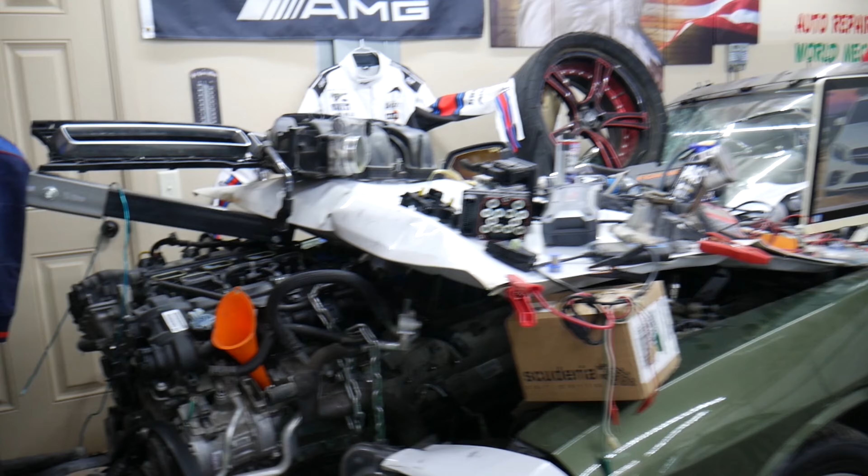So let's go ahead and start on it now. The hybrid fuses and relays—come guys, we'll show you where you can find them. Okay, mentally be prepared, we'll be working in many fuse boxes.

Quick guys, advice from us. 9 out of 10 owners of that Mercedes C-Class do not know about all the different fuse boxes in that Mercedes. You have many hidden ones. Some fuse boxes do not even look like fuse boxes. That's why we made one special video on our YouTube channel called 'Mercedes W205 Fuse Box Location and Diagram.'

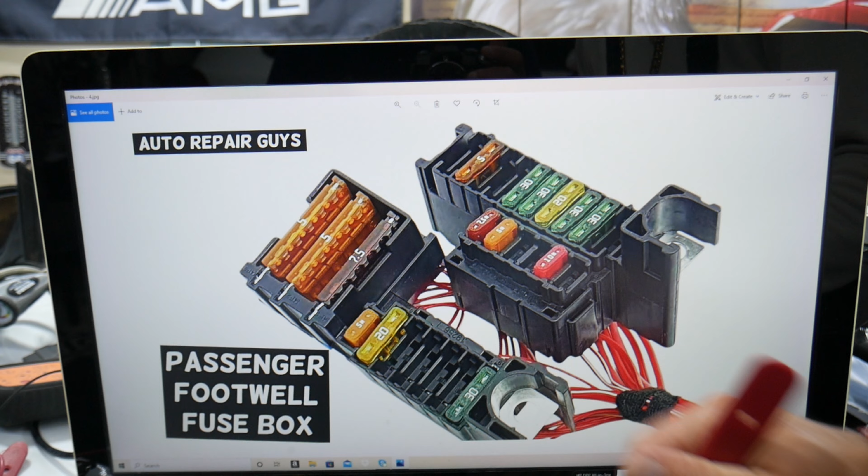And what do we guys need to do first? We need to come and open the passenger door. Here on the passenger side in the footwell compartment, on the A pillar, on that plastic trim, you have a cover. Open that cover. Behind it you have a fuse box with a layout like this one here.

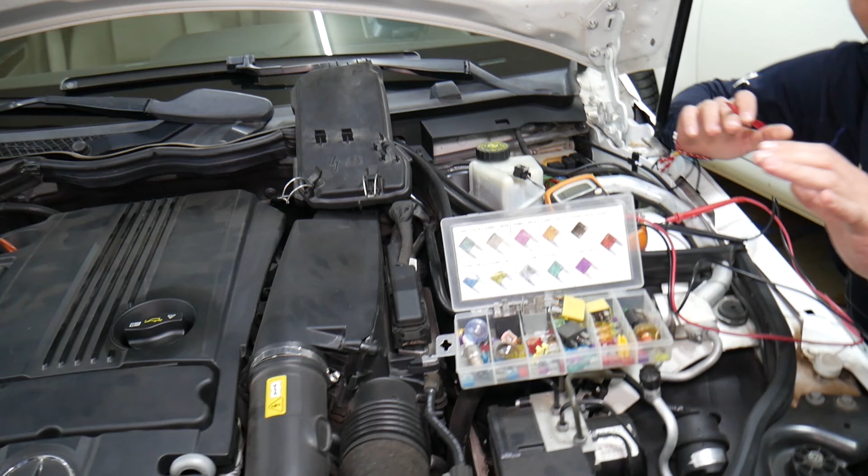Before we continue, let's explain quickly why it's always a good idea to test fuses and relays. People make one common mistake: they never test fuses or relays, they just look at them and assume they're good.

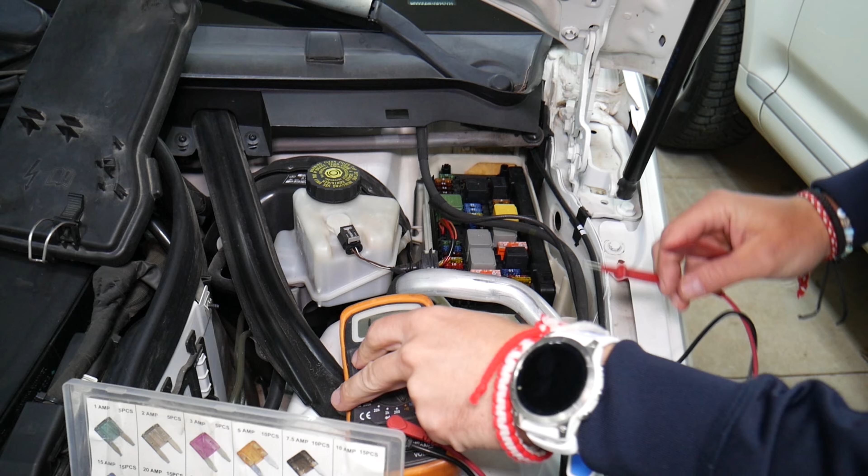At that point, they think they have a good fuse or relay and they start replacing modules, computers, and parts that can cost you thousands of dollars in repairs. Always test your fuses. You have no idea how many cars we've fixed for customers that said, 'Oh, I checked the fuse, everything's fine, but I still have a problem.'

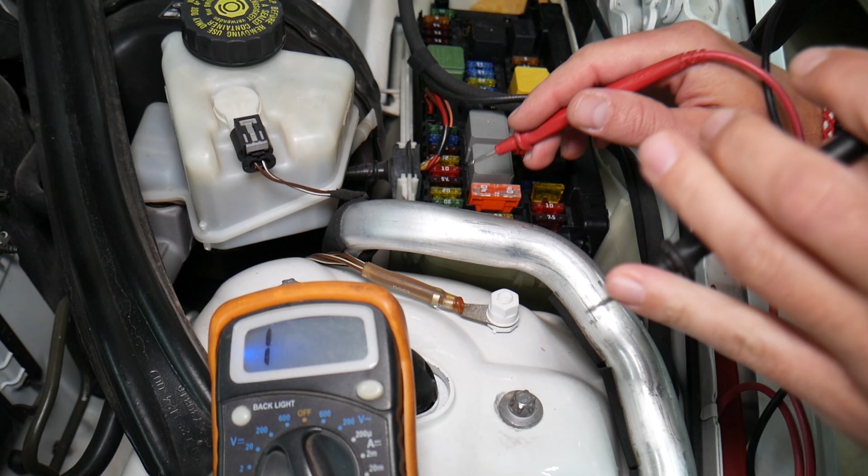Now, some fuses are super hard to see if they're burnt or not. Some of them will be really easily accessible—you can clearly see them—but there will be fuses that are not see-through, fuses that may look like they're not burned, but they're actually burned. And often, guys, you can actually test these fuses. Let me show you now without even removing them.

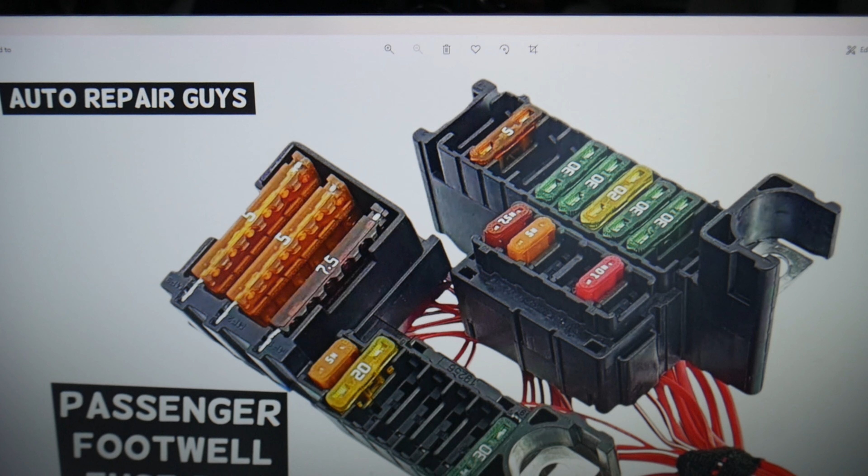Next guys, since we are already here in the interior, if you remove the glove box, behind it on the left side, behind the dash, you have a pre-fuse box. There will be many cables, of course, connected here. If you open it, you have that design here, guys.

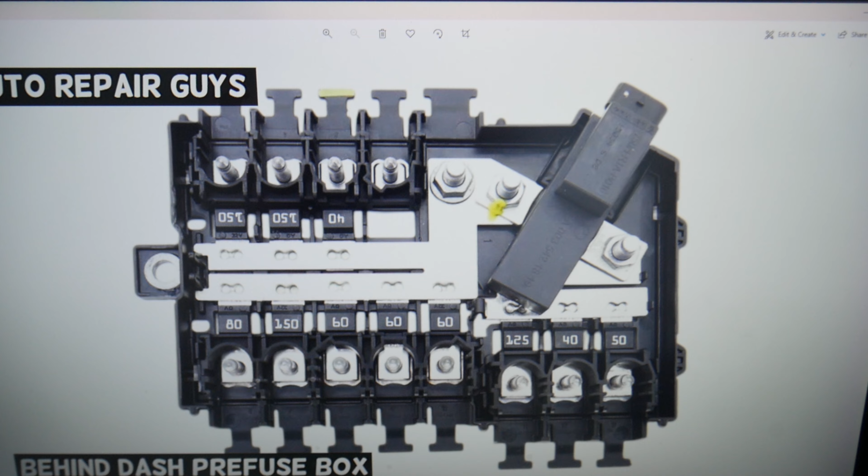Here we need to check two more fuses, okay, and you wonder which ones are those. Well, the first one is fuse number 2, okay.

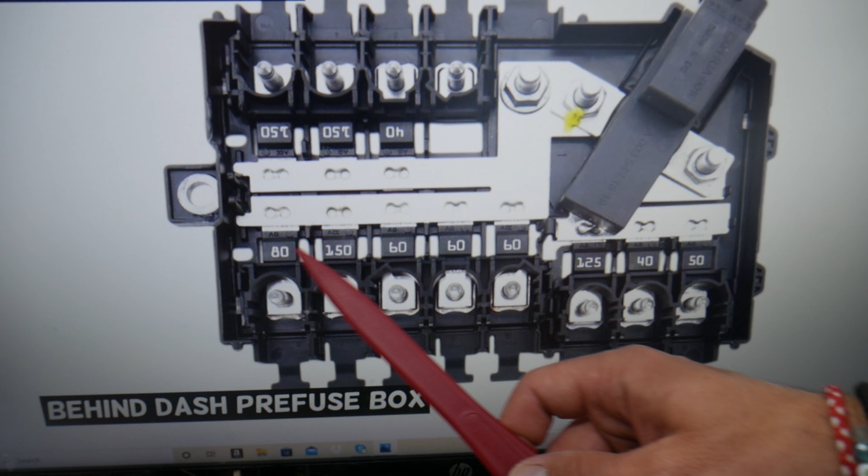Fuse number 2, guys, I want to show you that now, that's 5432. If you have it, it will be right here. That fuse box on ours was out of non-hybrid, so we don't have it, but that will be the fuse that you need to check. Then you need to check fuse number 10. It will be, because this one is 6, 7, 8, 9, 10. This fuse will need to be checked here.

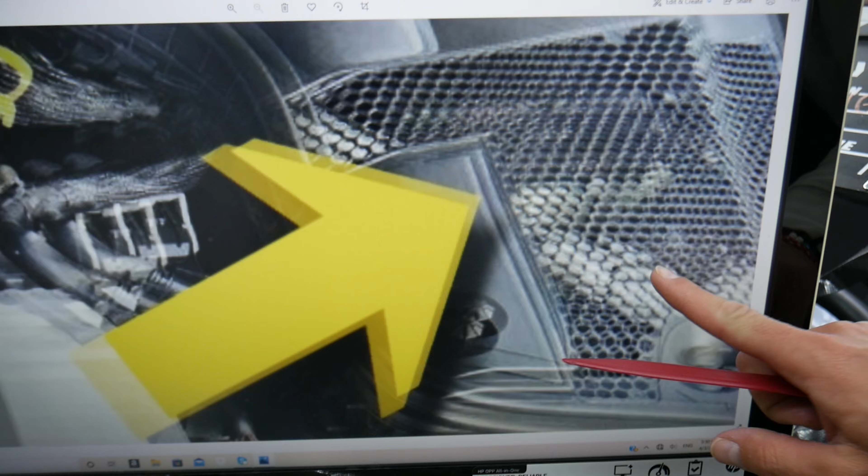Next, guys, we need to come and open the hood. Under the hood, facing the engine on the right side, on your driver's side, you see that knob? Turn it 90 degrees counterclockwise. You have one in the back, leave that cover, and right here you can kind of see the white and black. That's the engine fuse box with black lid. In order to remove the cover, unscrew the two bolts with Torx 22, open the cover, and that's the main engine fuse box.

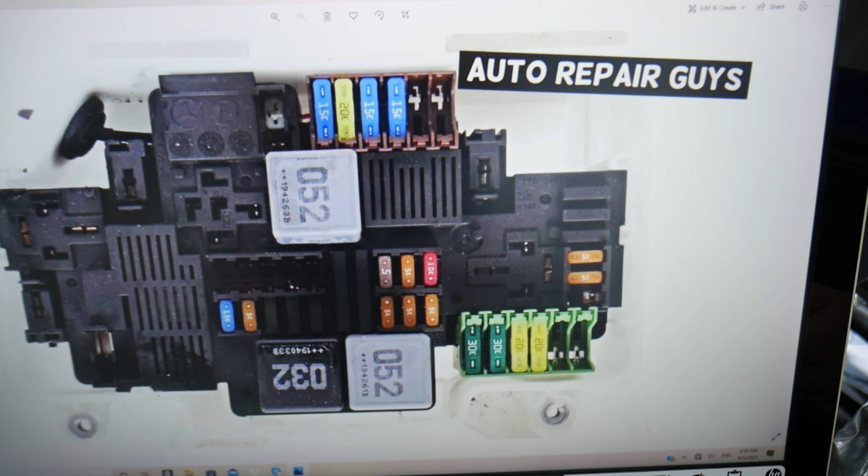Here specifically we will need to check a few more fuses, guys. Let me start now. Fuse number 100, where that one will be located, if you have it, it will be right here. It will be a humongous maxi fuse right here, fuse number 100. Then you will need to check fuse number 112. That one right here, this one will need to be checked.

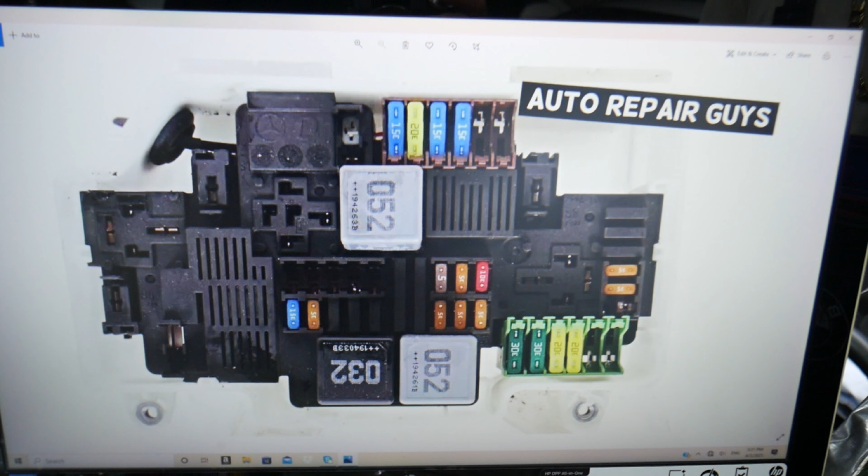Then you need to locate fuse number 118, guys. So that will be 15, 16, 17, 18. It will be that fuse right here. If you have that fuse, then you will need to locate fuse number 127. That one right there, 127. And you need to check fuse 129.

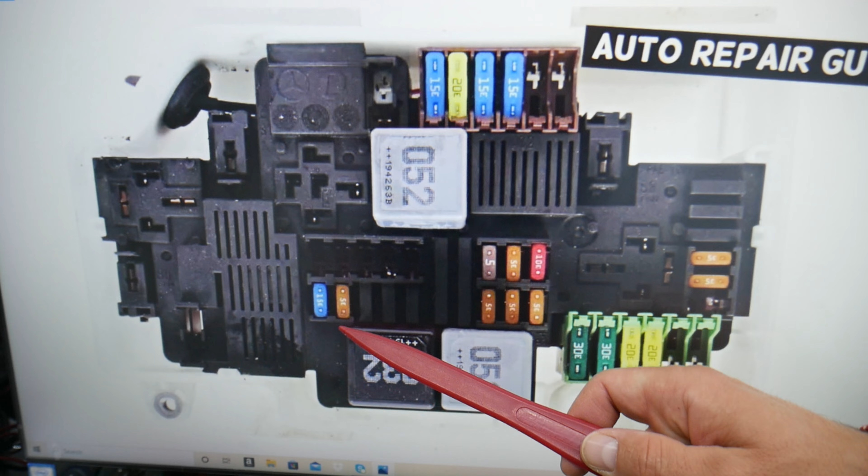Now 129, guys, you have integrated circuit fuses right here, which is 129 right here underneath, so that's a little bit hidden as well. You will have relay I right here that you will need to check. Let me show you what else you need to check. You may have a relay right here, Q, on the hybrids, that you will need to check as well. And here you have relay O. You see that relay? It's under the cover, integrated relay. That's O, J, and relay L. Relay O will need to be checked.

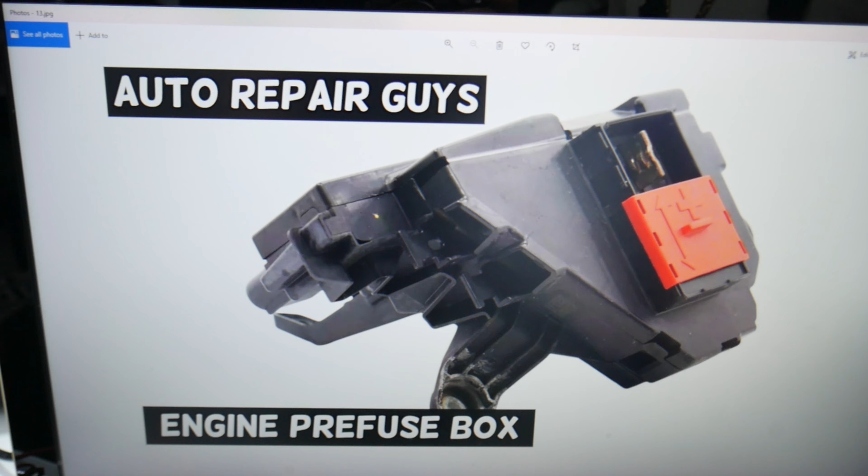Guys, we are not done. Why? Because here under the hood on the left side, facing the engine, on the passenger side, you see that cover where the battery sign is. If you open it, that's your positive, the jump starter terminal. That looks like this one, right? Now, guys, if you look at the back side, that's actually a pre-fuse box. And that pre-fuse box, on the inside, will have almost the same kind of fuses like the pre-fuse box behind the dash.

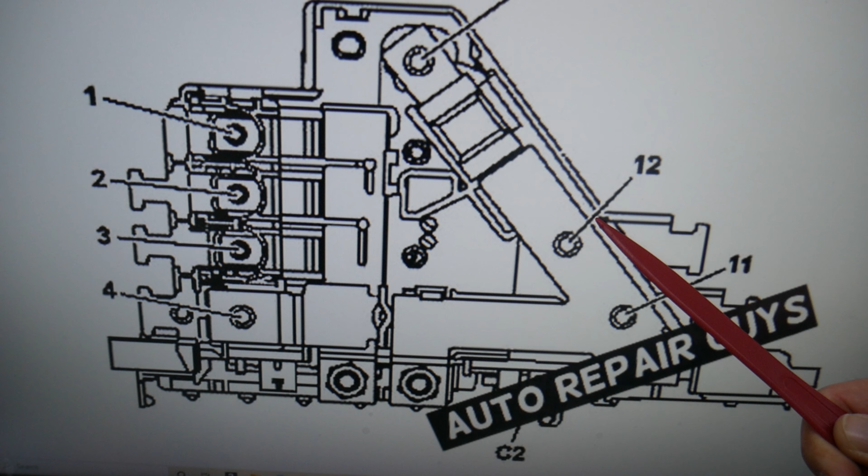Here specifically, guys, we will need to check a few different ones, and you have two different kinds. Now, if you have that pre-fuse box, depending on which year and model, you will have fuse number 12. If you have that kind of fuse box, it will be fuse number 12 that you will need to check. And also the other one, guys, will be fuse number C2 right here on the bottom.

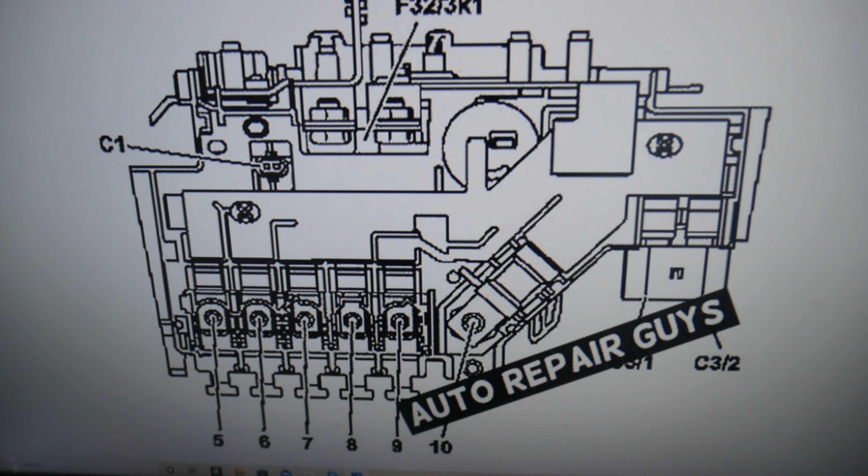Now, if you guys have the other kind of fuse box that looks like this one right here, you will need to check fuse number... okay, give me one second here, guys. We're talking about fuse C1 in that case, and C1 will be this fuse right here. It will need to be checked, guys. Okay, right there.

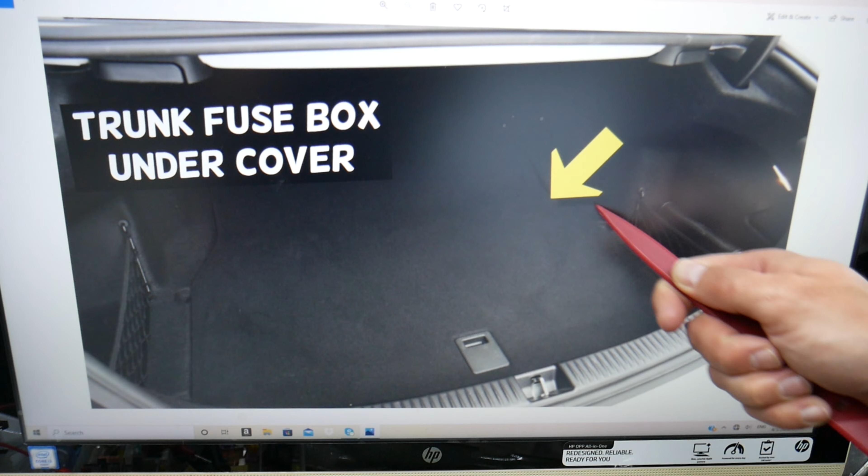Now we're not done. You think you're done, right? We're not. In the trunk, open the trunk, lift the carpet liner up. Right here in the corner on the right side, you have another carpet liner that's cut out, lifted up. Underneath is the main trunk fuse box.

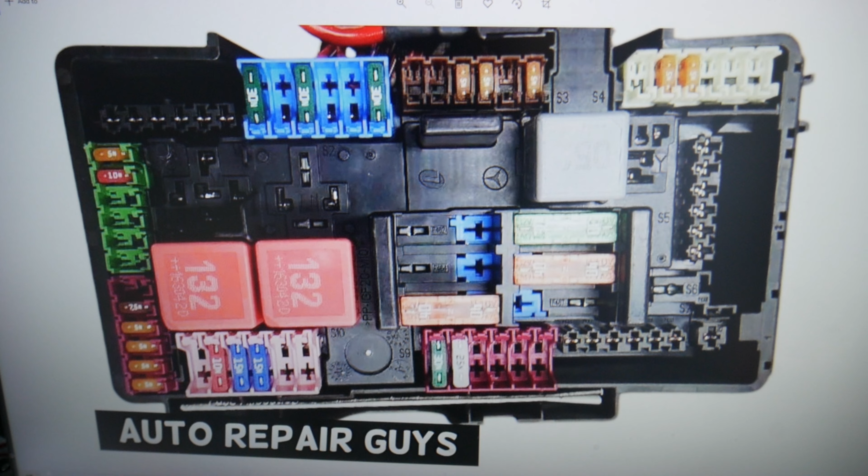And here we continue checking up to 3 more fuses, guys. I know it's ridiculous, but one of them is fuse 412. If you have the hybrid, you will most likely have this one. Fuse 457, that's 461, 460, 59, 58, 57, will be right here for 457. Then you will need to check fuse 459, so that's the fuse right here. So those are the main fuses and relays for your hybrid system.

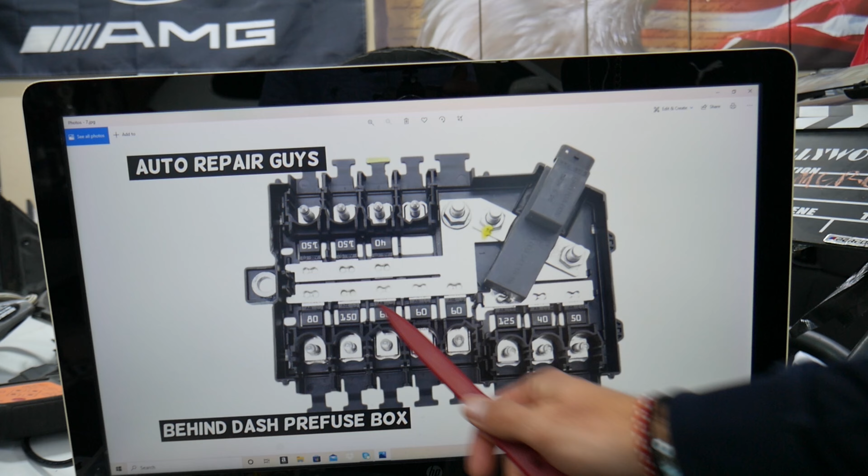Any of you having a hybrid, plug-in hybrid Mercedes C-Class W205, always check these things if you have problems with the hybrid system. Guys, quick advice: that generation Mercedes has all kinds of different fuses and relays. I want to show you some of them. Those are super special ones as well, guys, and those pre-fuse boxes as well. Check it out, you will have a great variety of fuses, relays.